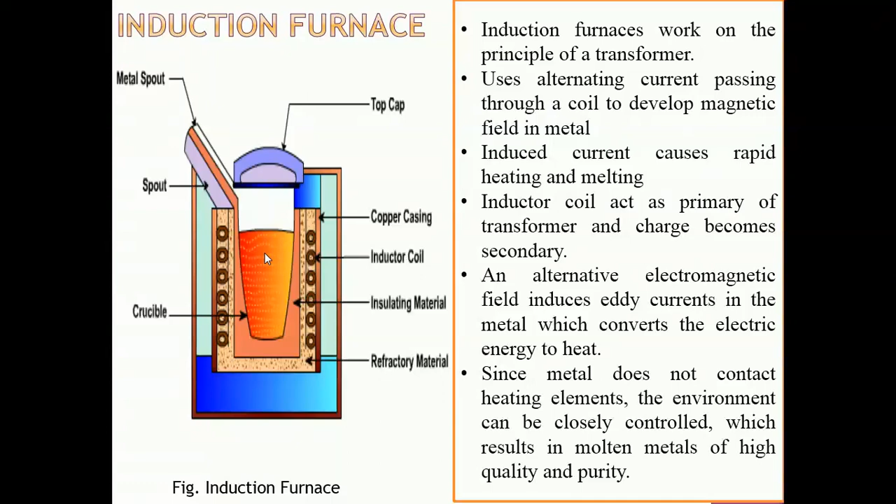Here electromagnetic force field causes mixing action in the liquid metal. At the center you can see white dots inside this figure, and this is called the mixing action of the liquid metal. This is called magnetic stirring.

Again, time taken for charge to melt is short, because directly secondary current or eddy current is developed in the metal charge. And why is heat developed? Because current is nothing but flow of electrons, and the solid metal charge has its own electrons, and there is a collision between the electrons of the current and electrons of the solid metal charge, and due to that collision heat is developed, and that heat we utilize for melting of the metal which is placed inside the crucible.

Melting of steel, cast iron and aluminum alloys, these are the common applications in the foundry industry. Capacity of this induction furnace ranges from 1.5 kg to 12 ton, and power required is 20 kilowatt to 15 megawatt for melting sizes of 20 kg to 30 ton. But as compared to cupola furnace, initial cost as well as maintenance cost of this induction furnace is more.

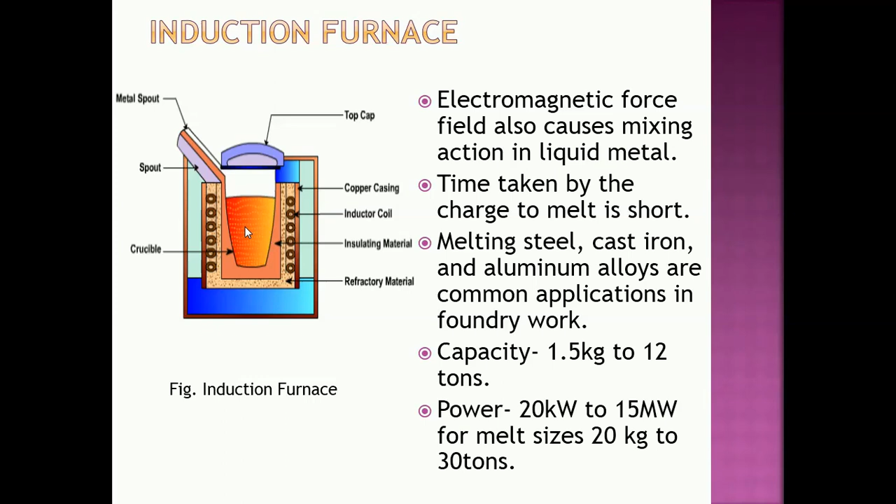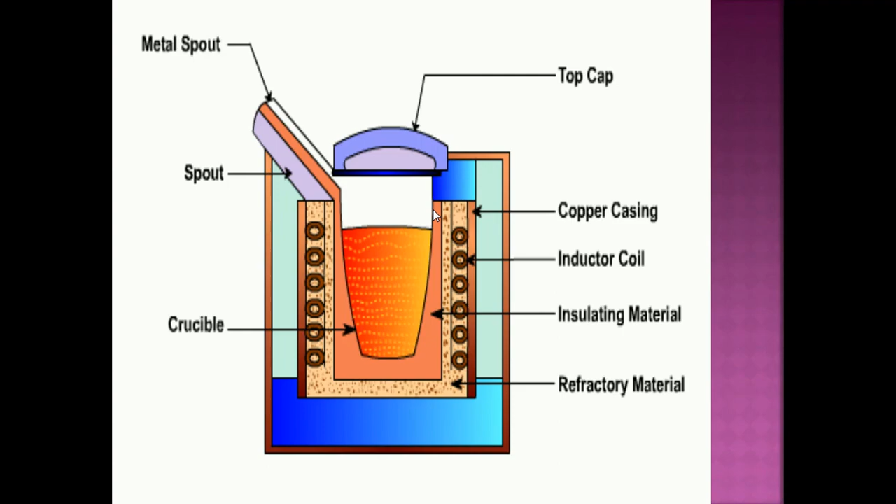Now this is the figure of this induction furnace. This is called a direct induction furnace, or this is also called a coreless induction furnace, and the second type is a core type induction furnace that we will see now. Now we will see the advantages.

Induction heating is a clean form of heating. We are using induction cookers in our kitchen also. If you start heating milk on an induction cooker, directly eddy current or secondary current is developed in the milk itself, and only that milk is heated without heating of that pot. Pot is at a warm temperature, but milk is at a heated temperature. This is induction heating. It is a clean form of heating. It is a non-contact form of heating. That's why there may not be impurity in the metal charge which is to be melted.

High rate of melting, that is high melting efficiency. All of a sudden, if I start the power supply, secondary current is developed in the metal charge, and I will get molten metal in a rapid manner. But in case of cupola furnace, 3 hours are required to get the molten metal. If I am starting cupola furnace, then only after 3 hours will I get the molten metal. That is a drawback of cupola furnace. Rapid melting is not achieved.

Alloyed steels can be melted without any loss of alloying elements. Loss of alloying elements takes place in the case of coke-fired furnaces, that is the cupola furnace, because silicon is converted into silicon oxide and manganese is converted into manganese oxide. These two are important alloying elements, and they are lost in the form of their oxides.

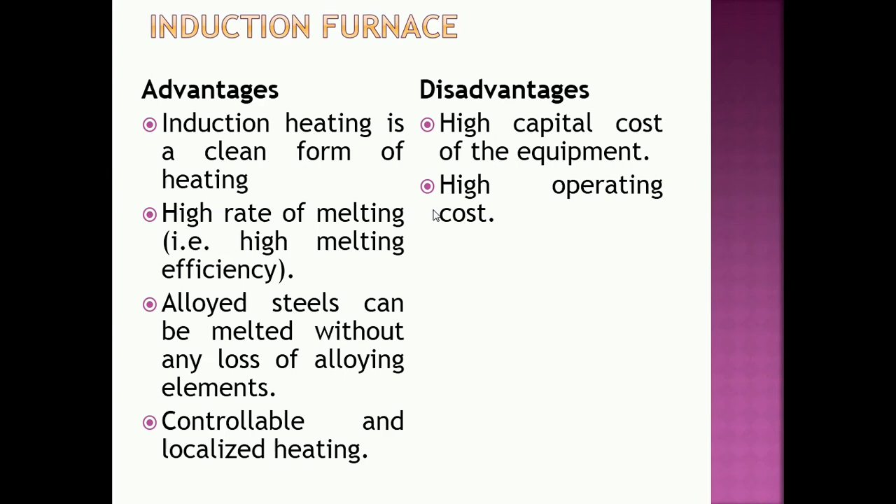Controllable and localized heating: you can control the environment of the induction furnace, and localized heating is there. Disadvantage: high capital cost and high operating cost. A continuous 3-phase AC power supply is required, and electricity charges are more for industrial applications. That's why the operating cost is high, and the capital cost of the equipment is also high compared to the cupola furnace, because the inductor coil is made of costlier material.

Now the second furnace is called the core type or low frequency induction furnace, and the first is called the coreless or high frequency induction furnace. The first furnace is used as a melting furnace, and this furnace is used as a holding furnace. Holding means we have to hold the metal at the desired temperature before pouring it into the mold. That furnace is called a holding furnace. Now we will see its construction.

This is the steel shell, which is lined with refractory lining from the inside. The hatching lines represent the refractory lining. This is the pouring spout, because this furnace operates on a liquid metal charge obtained from other furnaces. The input of this core type induction furnace is the output of other furnaces: the output of a cupola furnace, or of a high frequency induction furnace, can be input to this furnace.

This furnace only operates on a liquid metal charge. Remember students, this furnace only operates on a liquid metal charge. It does not produce the liquid metal. We can only keep the metal at a higher temperature by using this furnace.

Now you can see these arrows. They show the magnetic stirring or circulation of the melt, which takes place because of magnetic stirring. This furnace has a core made of laminated steel, through which we pass a primary current. Primary current is passed through the primary coil of this core type induction furnace, and the secondary coil is nothing but a channel of liquid metal surrounded by the primary coil.

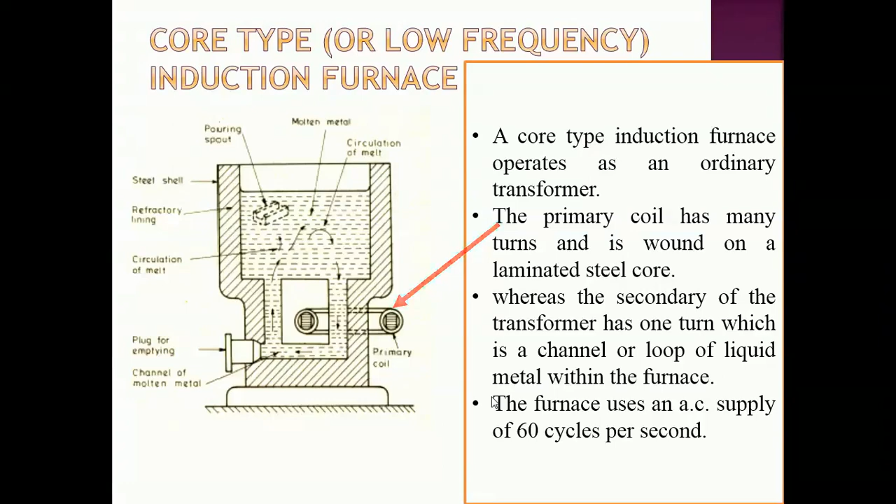This red arrow, the first arrow, indicates the primary of the transformer; the second arrow shows the secondary of the transformer. The channel of molten metal around the coil connects to the main metal container above, which holds the metal charge. This complete furnace has been filled with molten metal before the start of the operation. The heated metal in the channel circulates through and stirs the metal in the container, and the melting process proceeds.

Pay attention here. Whatever molten metal you are getting through the cupola furnace is not of good quality. That metal you can store inside this furnace, and inside this furnace you can add the alloying elements which have been lost in the cupola furnace, and you can improve the quality of the melt. For that work also you can use this low frequency induction furnace.

Once the metal reaches the required pouring temperature, it can be tapped out from the pouring spout. In the first chapter we have seen pouring temperature is equal to melting point plus 150 to 200 degree centigrade. After reaching that temperature, we have to remove this plug placed at the bottom, so that you can take this molten metal into the ladle and carry it to the pouring station for pouring inside the mold.

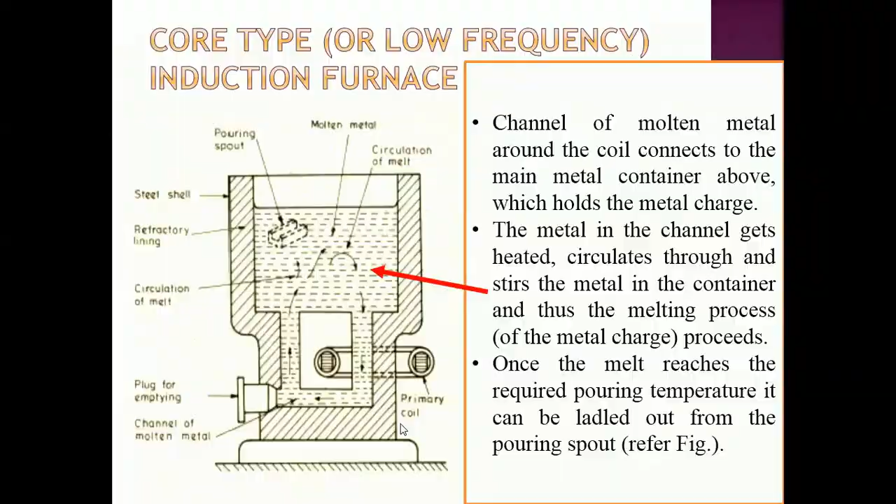This is a core type induction furnace. This is the figure for the core type induction furnace. You can see it is mounted on the floor. It has a steel shell which is lined with a refractory lining. Refractory lining means we have to protect the steel shell from the very high temperature of the molten metal. That's why refractory bricks are constructed on the inner side of this steel shell.

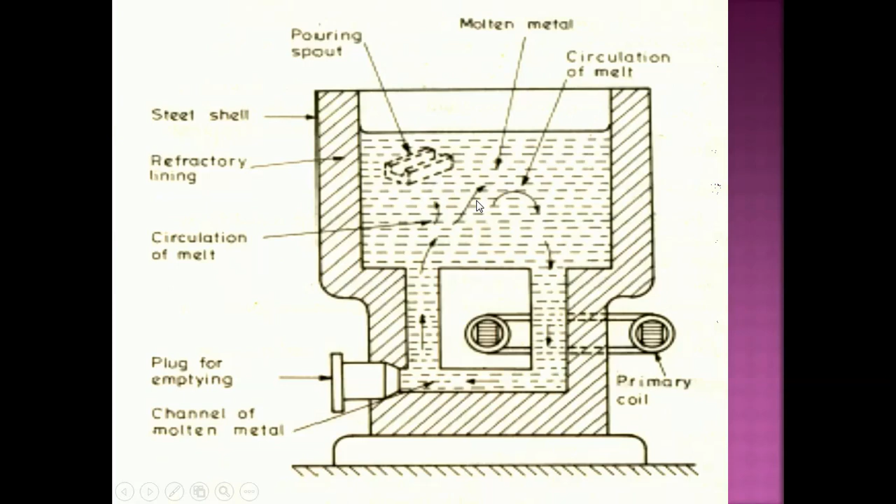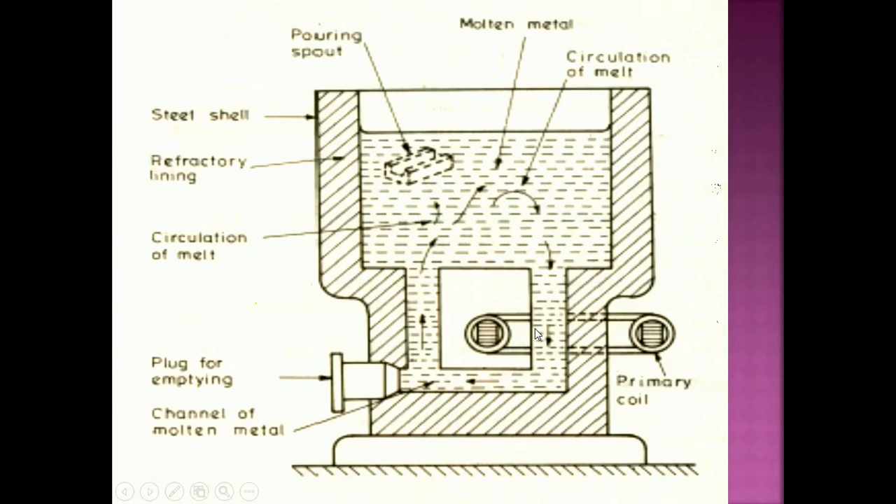It has a pouring spout at the top through which molten metal is taken inside this furnace, and it has a plug for emptying. Emptying means to remove completely the molten metal from this furnace. We just have to remove this plug, which is also made of refractory material, to remove the molten metal into the ladle, and it is used for pouring. This is the primary of the transformer, and the secondary of the transformer is nothing but the channel of liquid metal which is surrounded by the primary coil.

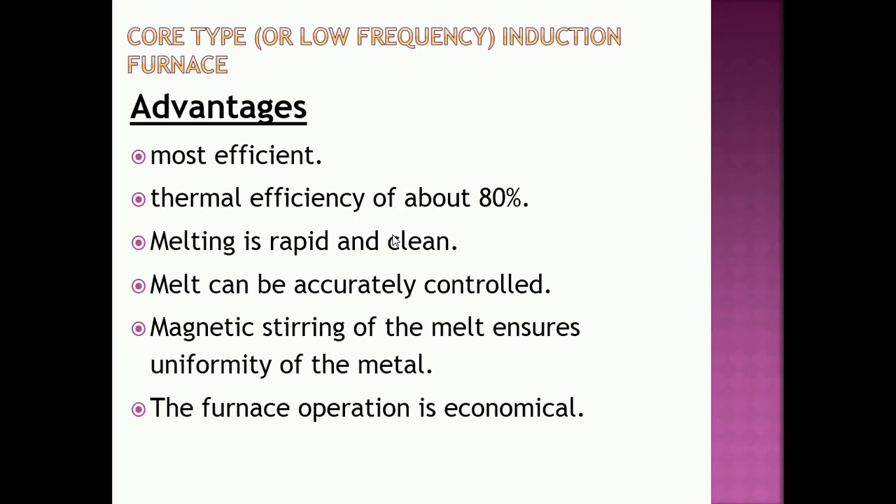The furnace operation is economical. Again, the furnace operation is quite silent. It does not make any noise, but in the case of the cupola furnace we are using compressed air, that's why it has a noisy operation. Electric arc furnaces also make noise, because we are making contact of graphite electrodes with the metal charge; that's why noise is created in electric arc furnaces.

Limitation: it cannot be operated on a solid metal charge. The second furnace, the low frequency induction furnace, cannot be operated on a solid metal charge. It only operates on a liquid metal charge procured from other furnaces like a cupola, high frequency induction furnace, electric arc furnace or crucible furnace. Furnace operation can be started only after filling the channel with molten metal procured from other furnaces. This low frequency induction furnace cannot be started on a solid metal charge.

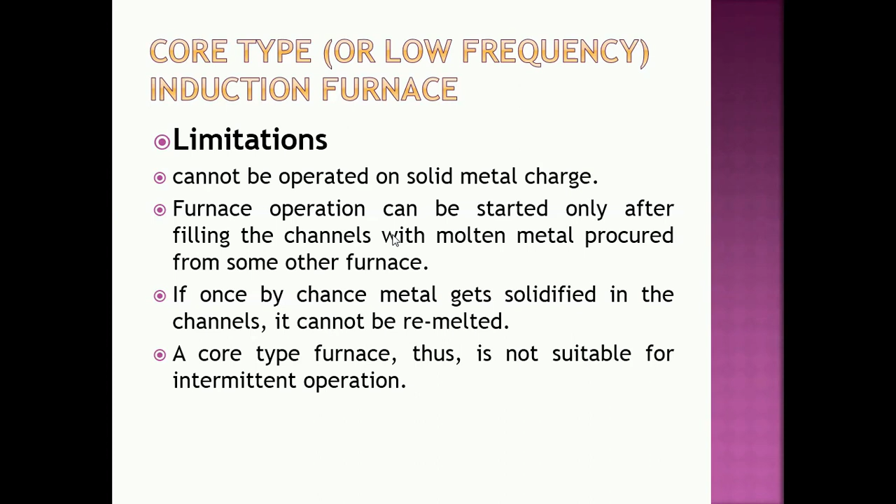If by chance metal gets solidified in the channel, it cannot be remelted. I told you this point; again we are repeating here. If by mistake the molten metal becomes solid inside the channel of the low frequency induction furnace, it cannot be remelted by the temperature developed in the low frequency induction furnace. We have to dismantle the furnace in this situation. A core type induction furnace thus is not suitable for intermittent operation; it is suitable for continuous operation. And this furnace we are using in pressure die casting or gravity die casting.

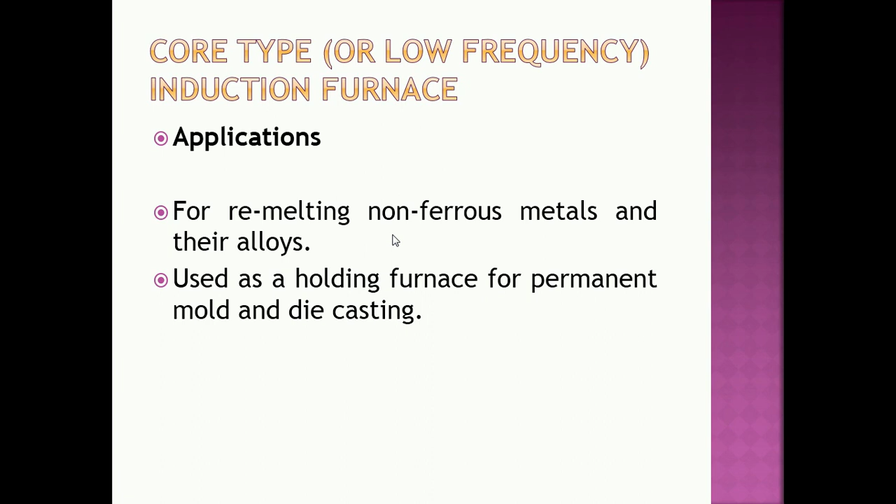Application: for remelting non-ferrous metals and their alloys. Non-ferrous metals generally have a lower melting point. That's why we can use this low frequency induction furnace for remelting non-ferrous metals. And this furnace is used as a holding furnace for permanent mold casting or gravity die casting and pressure die casting. Here we have completed the induction furnace. In the next lecture we will see the electric arc furnaces.